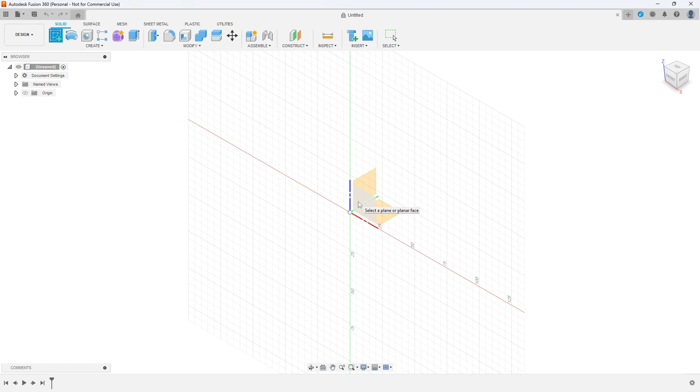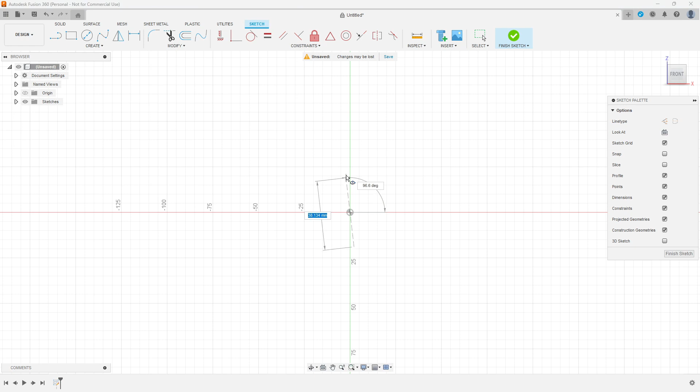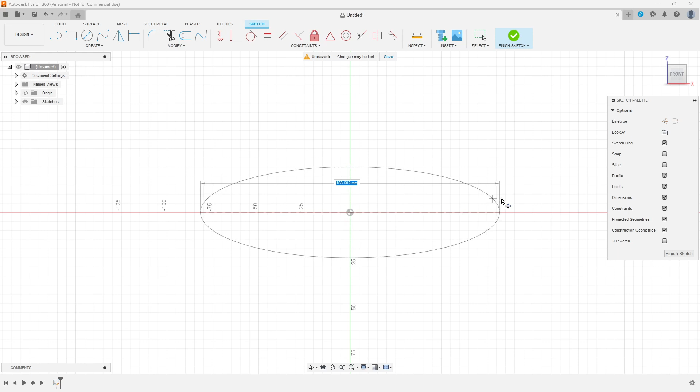What we're going to do is go up to create, click, down to ellipse, and start right on the center point, click down, drag up and release. We want the angle at 90, but if you hit tab it'll highlight the dimensions, and I'm going to go for 50 - you can make these whatever size you like, then click with the mouse. We can make this ellipse any weird shape and size, but what we actually want is something like a real squashed up circle. Then click when happy, and finish sketch.

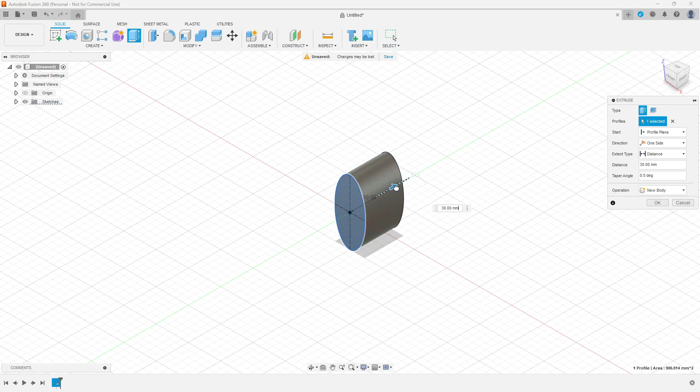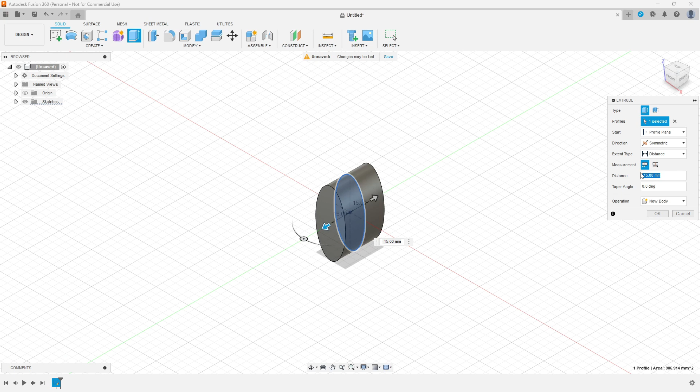Up to extrude, give it a click, and we want to drag it out both ways. So where it says direction, give that a click - we want symmetric. I want this a total of 8mm wide, you can make it any size you like, it won't affect it. So the distance here, I'm going to make that 4 - that's 4mm that way and 4mm that way, and it's making a new body. Click OK. Now the beauty about this is the center line is running straight down the middle, which makes it really easy for me to cut this in half when I've finished.

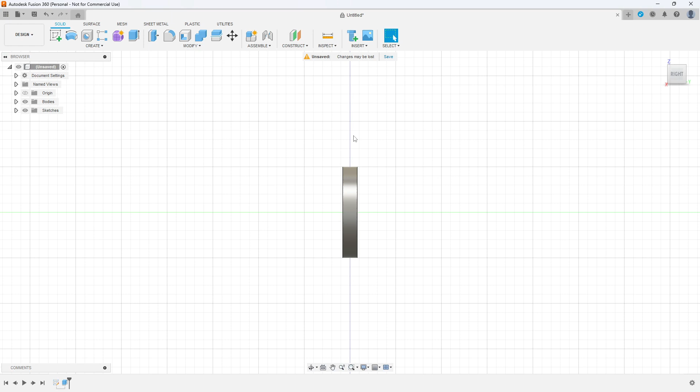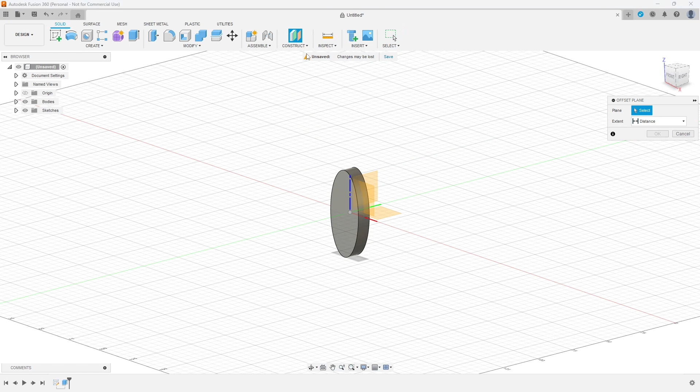Now what we want to do is start making the body of the key, the long bit - is it the tang? I don't know, something like that. So we go up to construct, then an offset plane. Because we don't want it to take it out this way or upwards, this one will bring it out here, so click on that one, drag it out a little bit so you can see. I'm going to go 120. I'm happy with that, and then I'll hit OK.

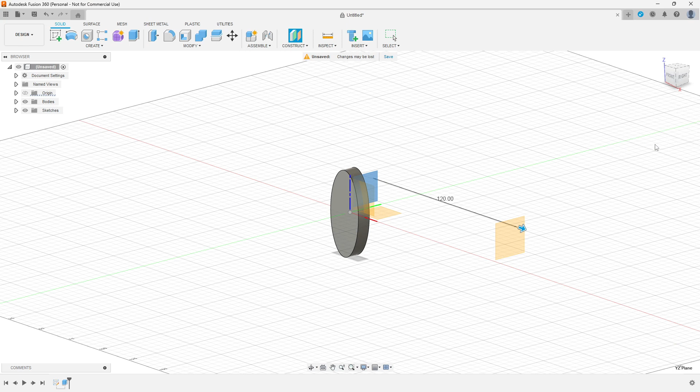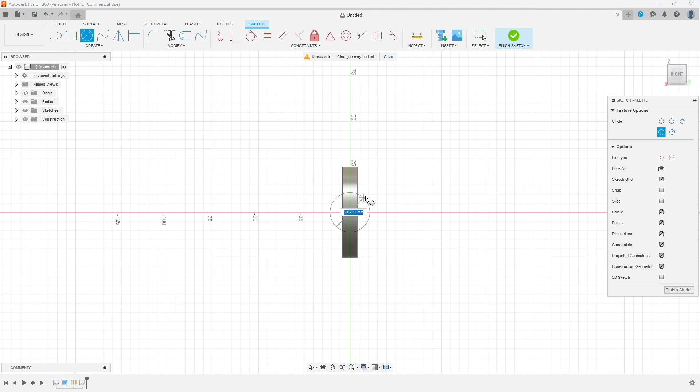And now we want to draw a little circle on it. So we click create sketch, and then just click on this - and it moves it, of course, which is really wonderful. From right in the middle, click down and release. I want this 7mm - the body, the handle part, is 8mm, so I'm going to make this slightly smaller at 7. Hit enter, finish sketch.

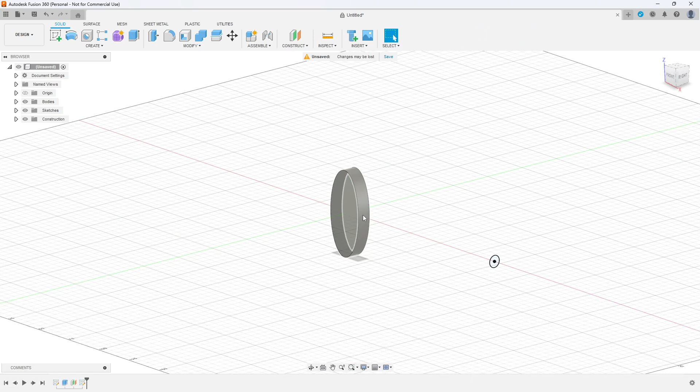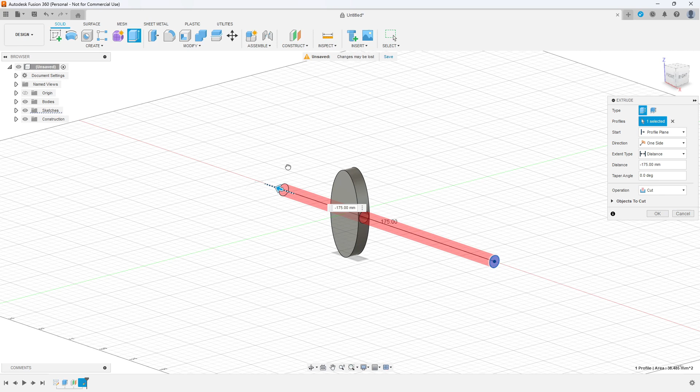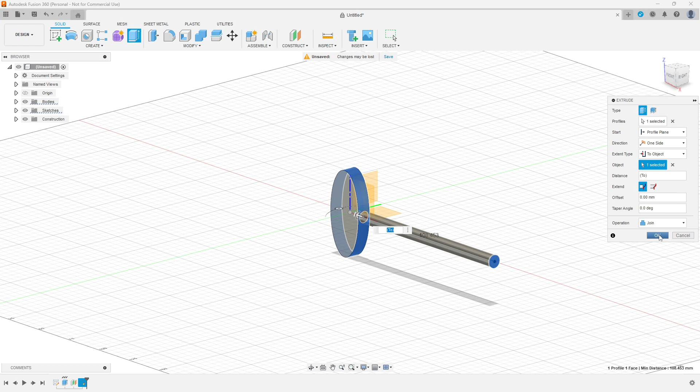Now we want to extrude this all the way down to the body there. Let's simply hit extrude, and it's got to go that way, all the way down into it. But as you see, it's going red, which means it's going to cut a hole through the middle, which is useful if you want a hole in the middle of an oval disk, but not for us. So extent type, instead of distance, I'm going to go to object, and it wants us to select the object, which is this - it does it automatically. It's on join, so click OK. There you go, it's even started to look like it's going to be a key.

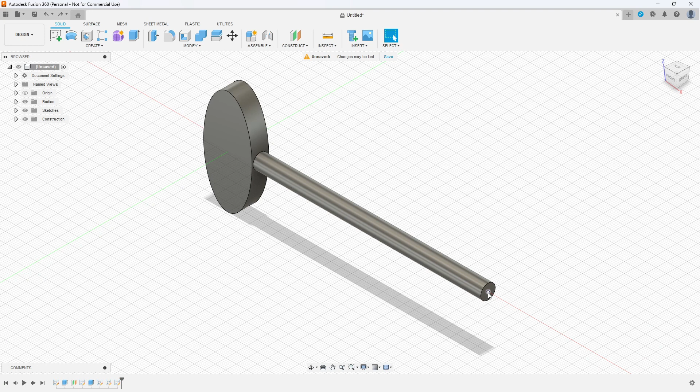What we want to do now is start working along the length of this, and we need a point of measurement, the dead center there. So we're going to hit P on the keyboard, that's P for project, and just click on the end bit there. I want to zoom in a bit. Right, it wants us to select something - I want to select this line, and it's told me it's selected. It's on specified entities and projection link is clicked, so OK. Now we've got a top, middle and bottom that we can work on. Go up to the line tool, click on there, then move and type in 10.

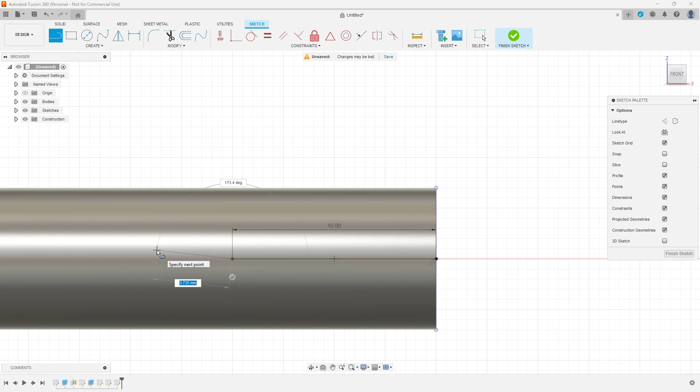And then click. That's all we need to do at this moment for that.

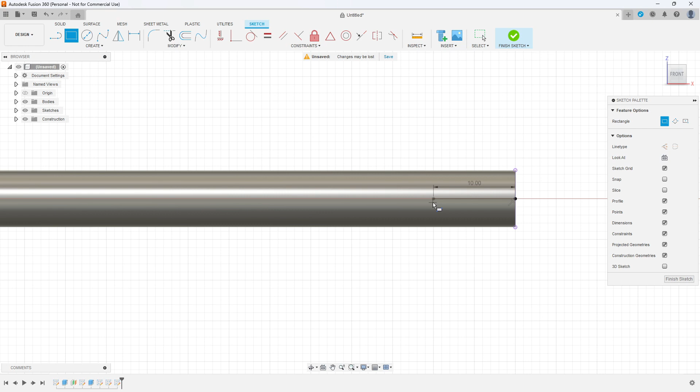Hit escape, tab over, and we want to zoom out a bit. We're going to go to the rectangle tool, click down, drag it out, and we want 25, tab 25, then enter. That's where we're going to have the working part of the key. Hit escape to get out of pan.

What I want to do is cut the shape out. Now you can do any shape you like, this is how I do it. I take a line, because this is 25, I go in blocks of 5.

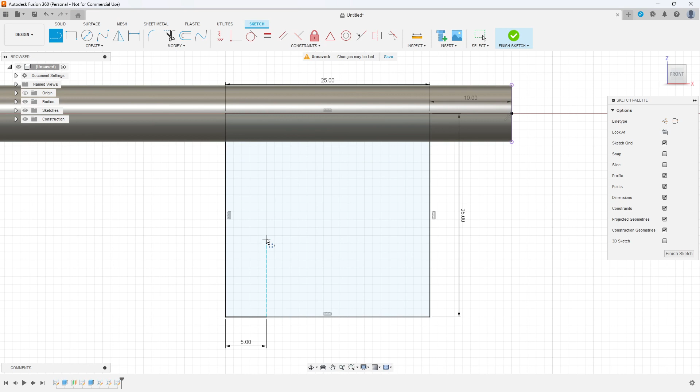I start here, 5 along. I haven't clicked, just type 5, then click, then go up. I'm going to go up 10, make sure it's at 90 degrees, and click.

Across 5, click. Up, I think up 10. Click. To the right 5, click. Down 5, I'm typing 5 on the keyboard then clicking the mouse. And to the right, we're going to go another 5, click.

Down, let's say 10, I've got that right. Click. Left 5, click, and down 5, click.

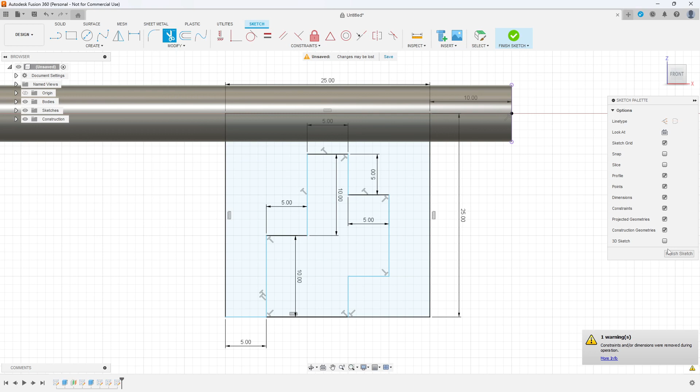Then over from here to here is another line. We're happy with that, or I am. Click on trim and just get rid of this line, you don't need that at all. Then finish sketch. I'm going to rotate this just a little bit so we can see it.

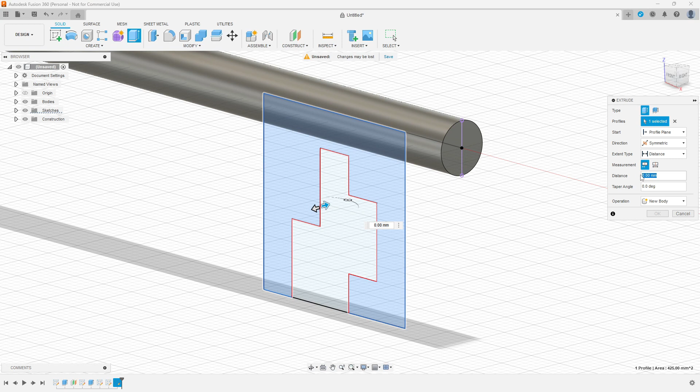Up to extrude. Now the handle was 8, this was 7, so I'm going to make this 5, I think. So again, we click this part, and we want to go, because that's dead center, we want to go symmetric. I think 2.5 is going to be okay, because I want it quite chunky.

It's gone red because it wants to cut. We don't want cut, we want join. Then click OK, and we take a look at it. That looks okay to me.

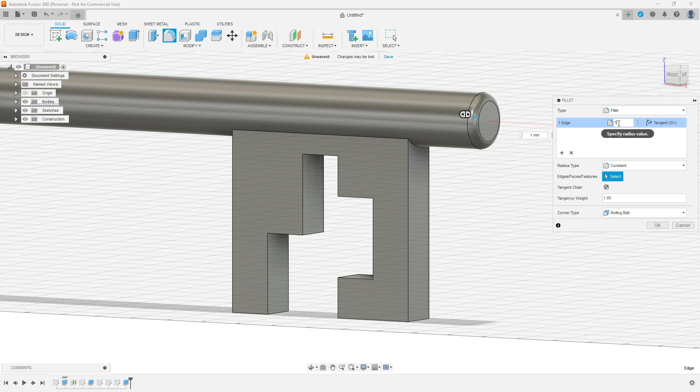Now all we need to do is make it look a little prettier. Up to fillet, and we want this in a nice little dome. Have a look what it does. If I type in 1, it rounds it over a little bit. 2, a bit more. 3, that's not bad.

4, doesn't like 4. So, 3.5, perfect. And then OK.

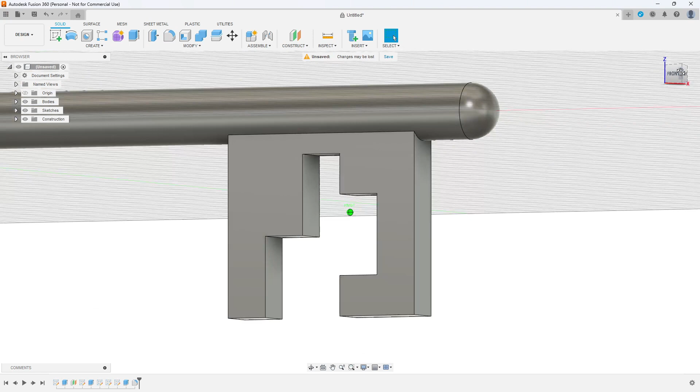Now I also want all these to be rounded over just a little bit, so it's just 1 millimetre. Up to fillet, click it, I'm just going to drag down and right. It's very different if you click right to left.

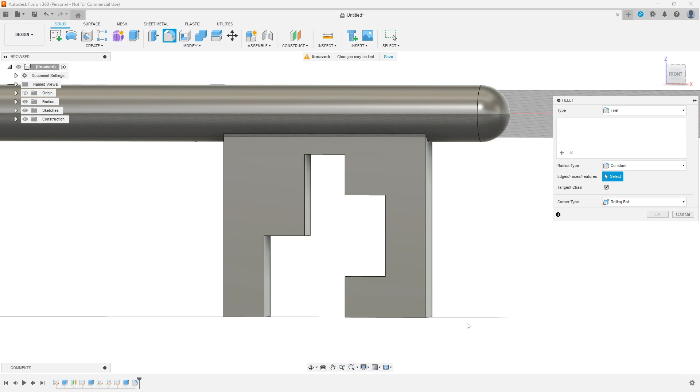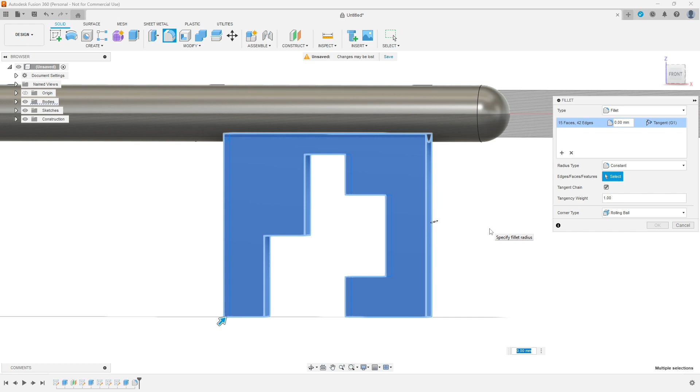I'll just cancel that and show you. Fillet. Now if I go from bottom right to top left, it's selected all this as well, and we really don't want that. I don't think it'll make any difference, but in some things it will. So we click fillet again, top left to bottom right. It just selects everything that is in that, all the lines that are in what you selected, as opposed to everything that it touches.

You just want 1 millimetre there. You can go 0.5 millimetre if you want, doesn't really matter. Just keep those settings as you can see, and then click OK. We'll have a quick check, make sure it's looking all right. Yep, that looks okay. Just click home.

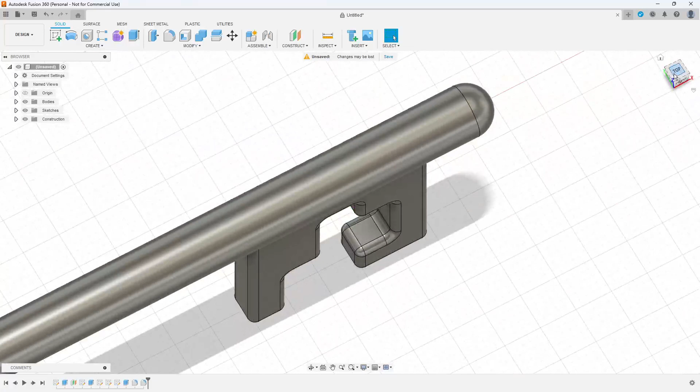Now I want to work on this. Create sketch and click on that face. And we want another ellipse.

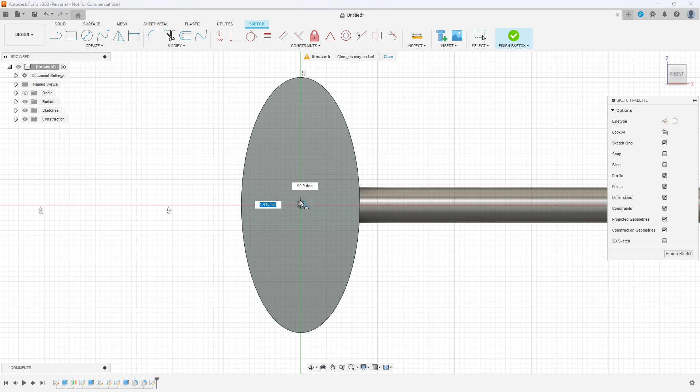Again, start in the middle, click, move up, and we want it fatter at the top, and we want it thinner there, just to give it that look. So I'm going to go up to about there. It really doesn't matter, give it 1 click, and then we can just move it to whatever we see fit.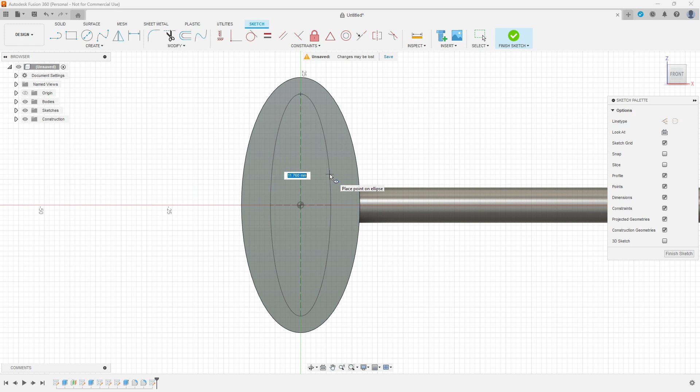I'm going to go there. That's just a click, and that's done. Finish sketch. I'm going to rotate it just a little bit.

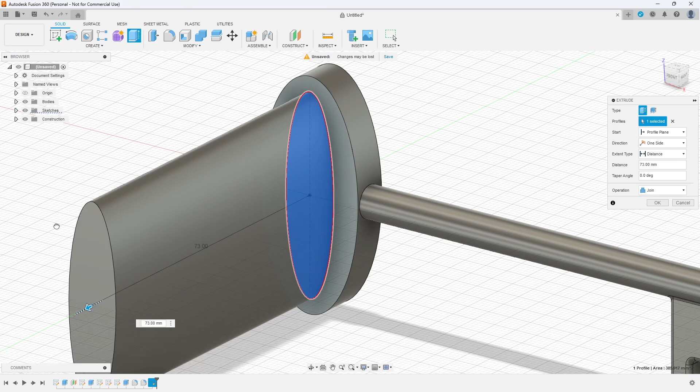Extrude, and we want to go the other way because we want to cut. It doesn't matter if you go too far, that would make a long body, but because we're cutting and there's nothing on that side, you don't have to specify a number, you just drag it out. You can see it's on cut because it's red. Just click OK, we'll have a look.

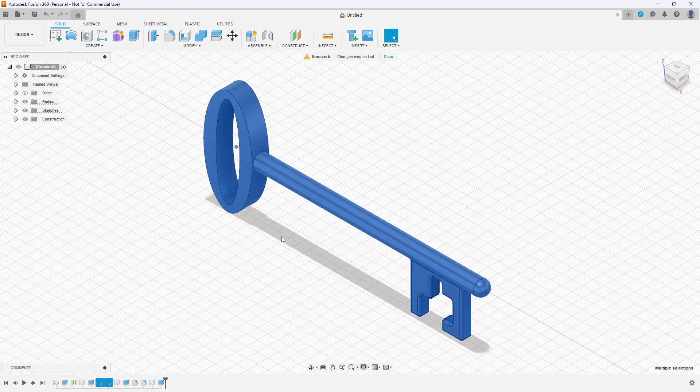And there you go, starting to look like a key. We'll just tidy that up again. What we want to go up to is fillet, top left, and go down again. And I'm just going to put a 1 millimetre fillet on all of that lot.

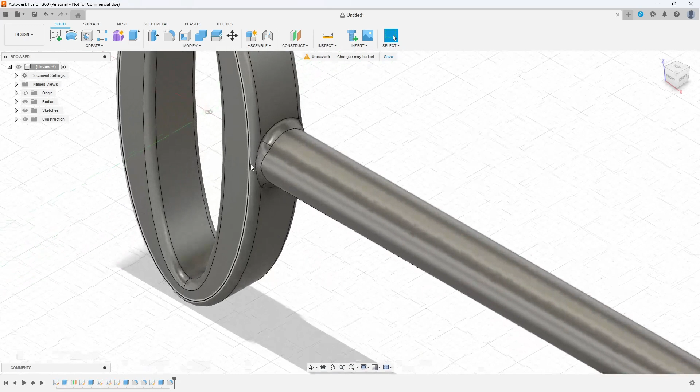And then OK. Now if you have that the same thickness as this part just here, it really struggles with it. I tried it at the same distance and it said cannot compute, it's too complicated, which is a bit silly, but never mind. So that's a finished key, and that's looking pretty good.